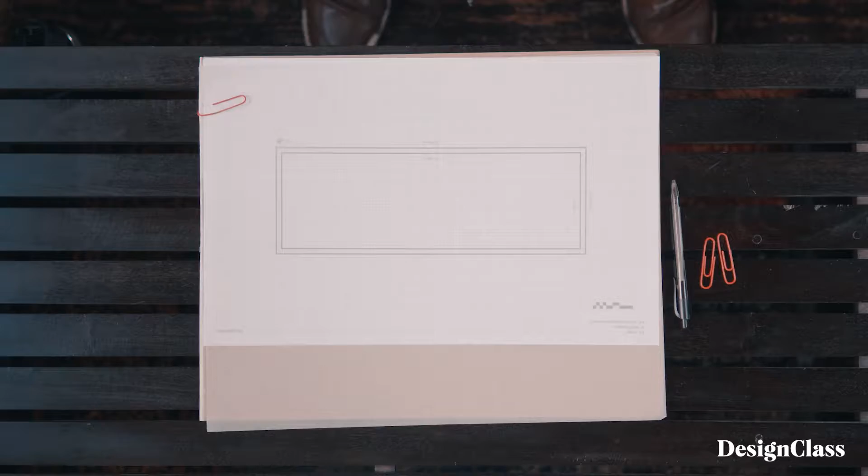Jump into the Pyramid Peak. That is a 24-foot long unit. It is 8.5 feet wide. When I designed that house, the thought process was single person, sleeping on the main floor, good sized kitchen, and a bathroom that had a bathtub in it. So the 5-foot tub shower was important in that particular design, as well as taking into consideration that front room and the amount of windows, and then the feel.

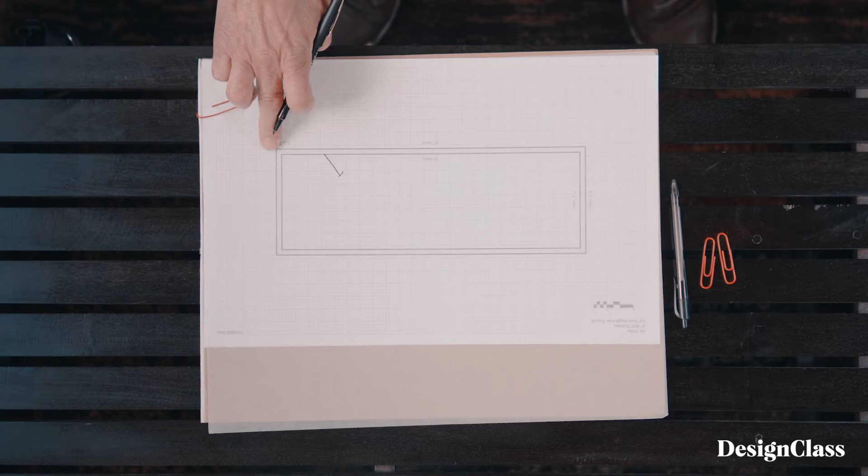But stepping into that design and the thought process behind it, walking in the front door - that front door is 5 feet from the end wall. That enabled me enough room to place a bed, or a sofa bed in this area that was, in that case, right here. It gave me the ability to do 4 windows. Those were 24 by 80 windows. I wanted to do a nice long window that was high off the end wall - that was a picture window. I call them a transom window off the end wall, and that was the hitch end here.

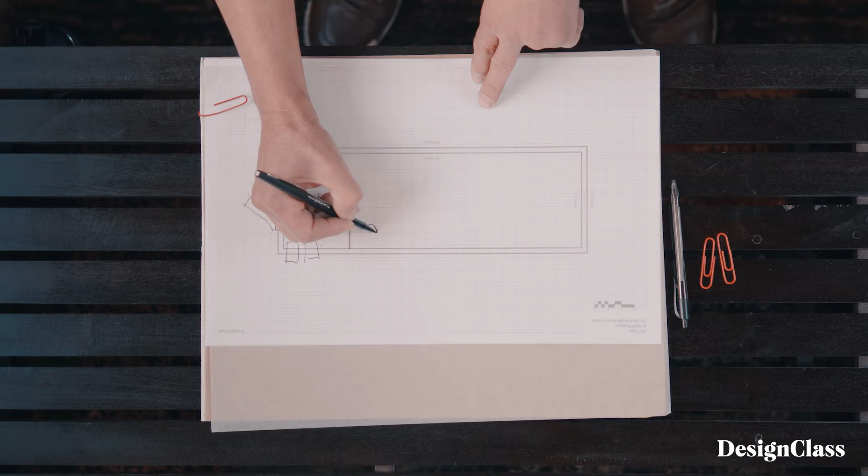And I also thought about what I wanted to do was have a tiny house that had a workspace. So I designed this little sitting area there, and I did this butcher block that came out like that, in kind of a banjo design, with the ability to put a chair there, and a chair there. Then I wanted to run the kitchen. So I also thought about lighting here, a window - so I added a window there.

The kitchen on the flip side here, my thought was to provide a space for a washer dryer. So I did a nice big cabinet right there, tall. The lower portion is designed to house the washer dryer, and the upper portion is for storage, closet space. And then I put a little clothes hanging rack right there. And then the rest is your kitchen. So I ran the kitchen, voila, nice long kitchen.

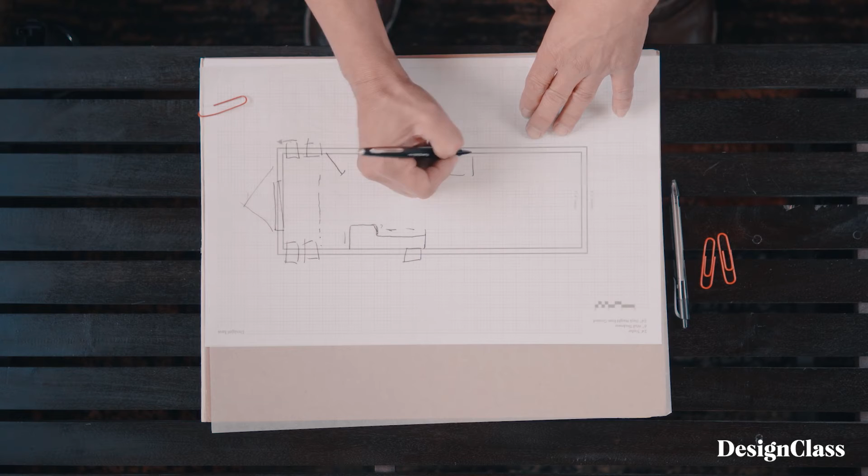I used 24-inch sinks. Maybe you want a bigger sink - maybe it needs to be a 30-inch sink. That's going to impact your size of cabinet too. Above the sinks, I typically put a window. In that case I did a 24-inch by 80-inch window above that - lots of light. Across from here, counter space. I had the range put in there with a microwave above it. And then we had the refrigerator. And then over here was the bathroom.

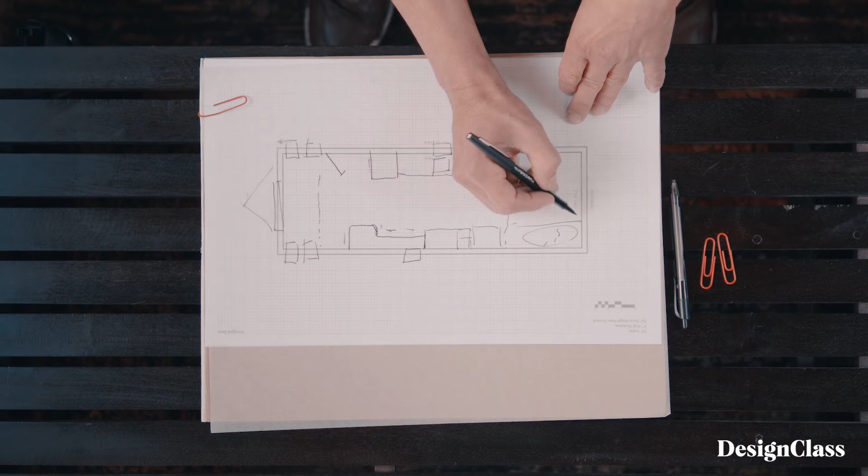So that is a 5-foot tub shower that I put into that area there. And knowing that I only had so much width to work with, I used a smaller sink in this area than I typically would, and then I did a nice amount of storage. I've got drawers and cabinet space in this area here, and then we've got a toilet that's in this space here, and I've got a window above it for a nice, large, functional bathroom. And that was really the thought that went behind that.

This loft that's above the bathroom - a lot of times, because you've got to enclose that bathroom ceiling, you don't really, in my opinion, want to open all the way up 10 feet, 11 feet high to the ceiling because it's kind of a waste. So I use that space typically for loft, for storage, for sleeping. So that's what I did in this case. So above here is the loft space.

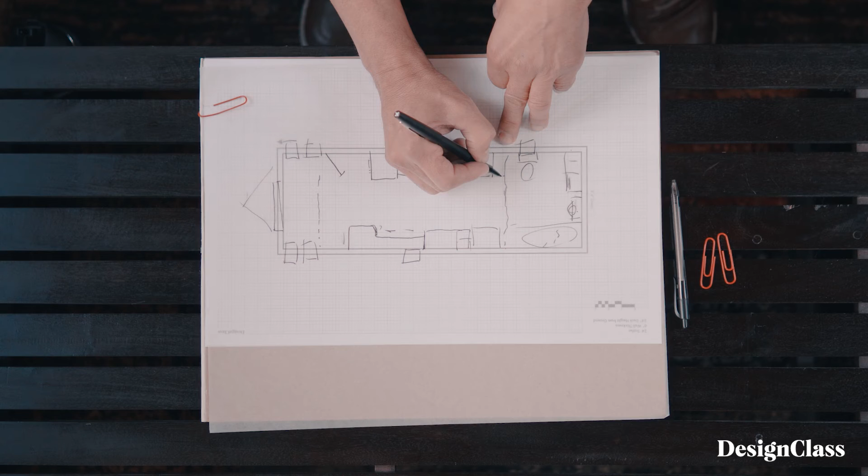Then the other thing we had to consider was the ladder. How do you access this loft? I ran that cabinet within 6 inches of the bathroom wall because this is where my ladder storage goes, right into that spot there. Determine how you're going to store that ladder, how it's going to come out, how you're going to keep it from tipping over.

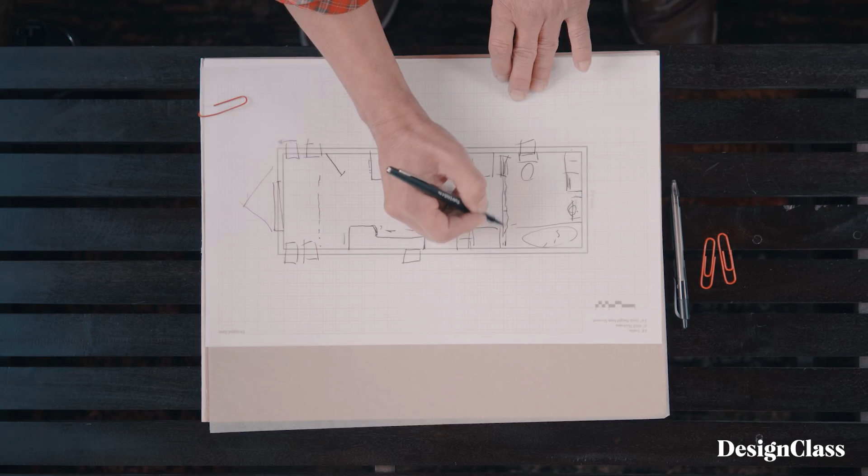In this case also, as I look at this design here, the door we talked about - this is a pocket door, so it's encased inside this wall, and it slides out in that direction right there. Your refrigerator is here, and once again, the refrigerator is on a platform because of the wheel well, so it's raised up off the floor. You need to really think about the size of that refrigerator before you get a big honking tall refrigerator and stick it in there and you can't get into it. So a lot of things need to be thought through as you're designing and building your tiny house.